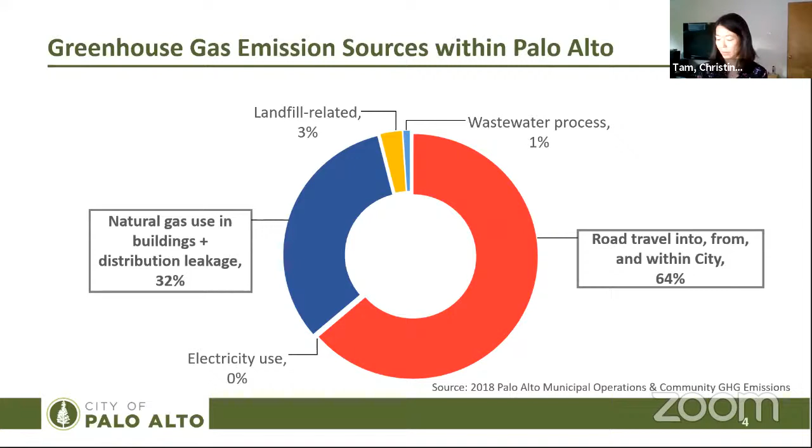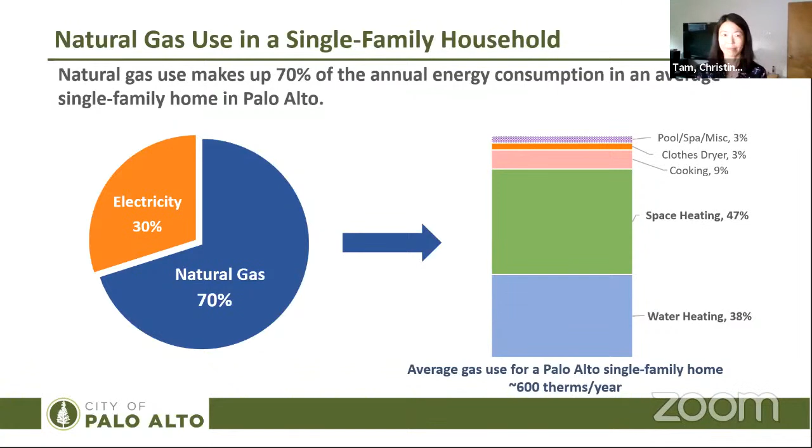So you might ask, isn't natural gas a clean energy source? Well, natural gas is a fossil fuel, and it's usually found in layers of rock formations or in tiny pores within shale formations. Shale gas is extracted by a process called fracking, which is a controversial topic because of its damaging environmental impacts. Natural gas is a mixture of hydrocarbons, primarily methane. It also contains natural gas liquids, such as ethane, propane, and butane, and traces of nitrogen and hydrogen sulfides.

Natural gas has no color and no smell. However, a sulfur-based odorant is added to give it a rotten egg smell, which allows people to easily detect gas leaks. Burning natural gas produces carbon dioxide, which is a key source of greenhouse gas. Other combustion byproducts include carbon monoxide, nitrogen oxides, and sulfur oxides. These pollutants are harmful to your health if the vents for the gas furnace, the gas water heater, and fireplace are not properly installed or maintained. Cooking with a gas stove without proper ventilation can result in unhealthy levels of nitrogen dioxide inside the house, and this can increase the risk of respiratory issues such as asthma.

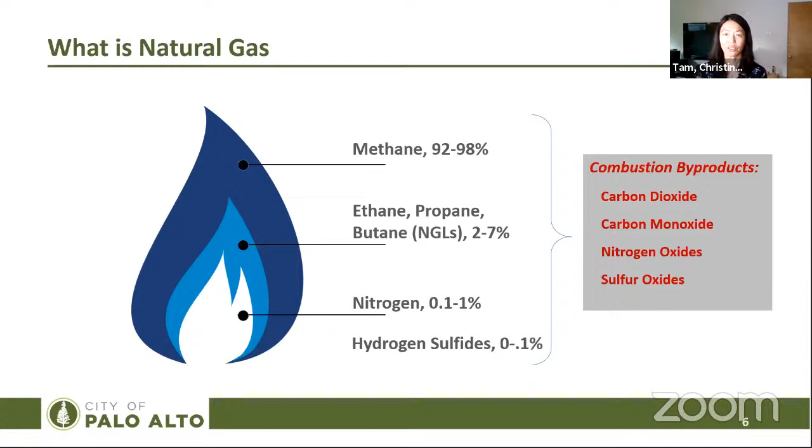There's another problem with natural gas. The natural gas system, from production to transportation pipeline, down to the gas appliances in your home, is leaky. Around 2 to 3% of the methane is leaked from the production and transportation of natural gas into the atmosphere, and then another 0.5% of methane is leaked inside the home. While these percentages may not sound like a lot, methane is a very potent greenhouse gas and has a global warming potential that is 86 times higher than carbon dioxide over a 20-year period.

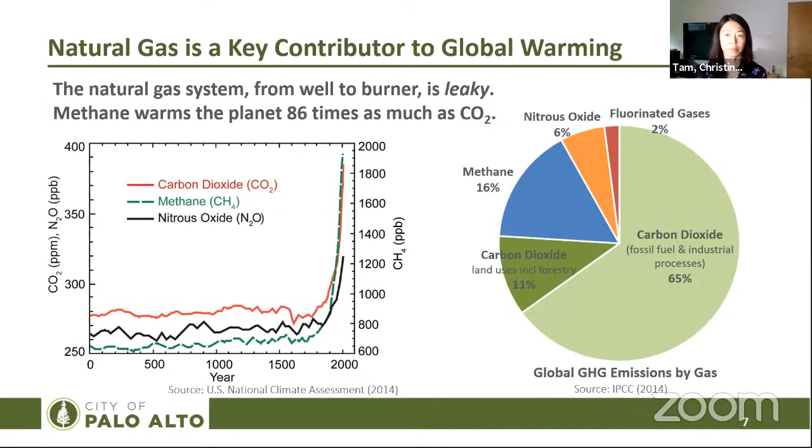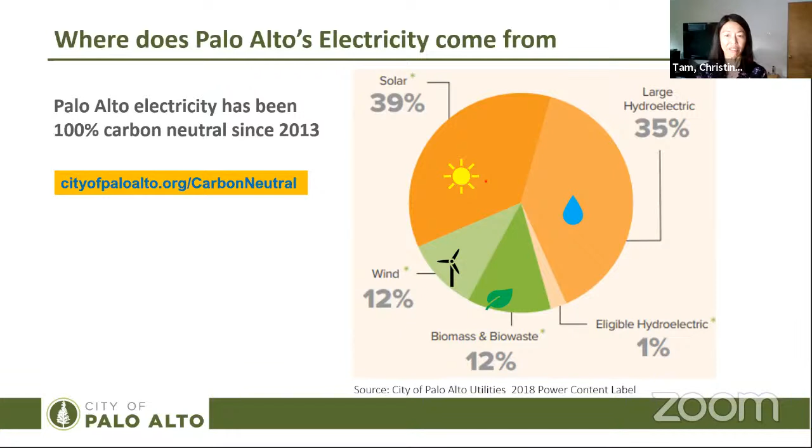So let's turn now to look at where Palo Alto's electricity comes from. Palo Alto electricity has been 100% carbon neutral since 2013, and this means that electricity supplied by the City of Palo Alto comes from clean, carbon-free sources, including hydroelectric energy, solar energy, wind, and biomass energy. Palo Alto does not have any long-term power contracts for gas-fired electric generation. At the state level, California has already phased out coal-fired electric generation. By 2045, 100% of the California electric grid will be carbon-free.

With all electric appliances, you get the peace of mind that there will be no risk of gas leaks and no unhealthy combustion byproducts. Also, since there's no open flame from gas appliances, there's also a lower fire risk. So choosing electric is better for your safety, better for your health, and better for the planet.

There are some very efficient electric alternatives to gas appliances, and I'll be focusing on two proven technologies that have been around for decades and are well suited for home applications. The first one is the electric heat pump. A heat pump is a device that uses a small amount of energy to move heat from one place to another. The refrigerator in your home is an example of a heat pump. It pulls heat from inside the fridge and dumps it into the surrounding air.

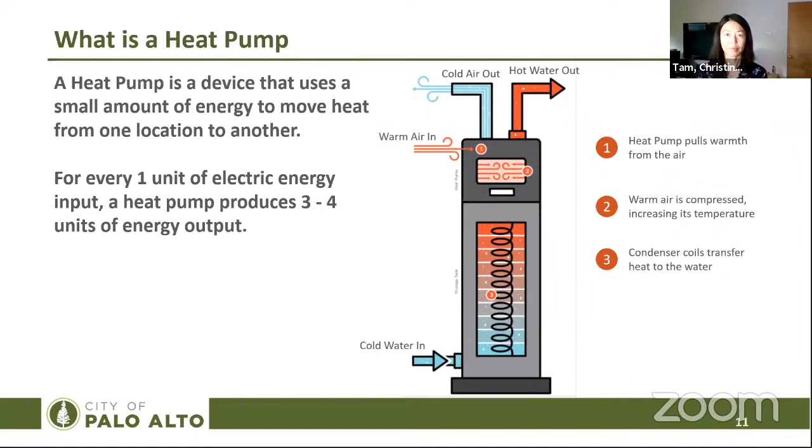All gas water heaters have a flue pipe to send the exhaust gases outside the house. However, there is a risk of backdrafting, which means the combustion gases are flowing back inside instead of out through the flue pipe. Backdrafting could happen when the air pressure inside the house is lower than the outside. The combustion gases contain carbon monoxide, which is lethal, and that is why California law requires carbon monoxide detectors in homes.

Let's compare the efficiency of different types of water heaters, which is rated using the energy factor. The higher the energy factor, the more efficient the water heater is. Heat pump water heaters have an energy factor that typically ranges between 3 and 4. The energy factor for gas water heaters, on the other hand, is always less than 1. Usually between 0.6 to 0.7 for tank style and 0.9 to maybe 0.95 for tankless models.

Heat pump water heaters also provide smart controls that allow you to remotely control the water heater or save energy when no one's home by setting it to vacation mode. If you have a rooftop solar system at your house, you can program the heat pump water heater to run during the hours when you have excess solar output from your PV system.

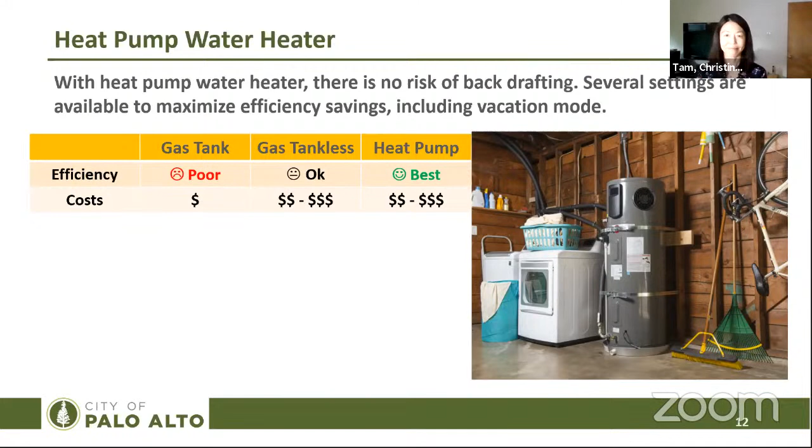So next, we're going to talk about another heat pump application for your home, the heat pump HVAC. A gas furnace can provide space heating only, and an air conditioning system can provide cooling only. A heat pump HVAC can operate in both space heating and cooling mode, and very efficiently. It also provides good air filtration, which can be very important given the poor air quality we've had over the past few months.

Heat pump HVAC systems have two parts, an indoor unit, which is the air handler, and the outdoor unit, which is the heat pump. We'll go over two types of heat pump HVAC systems. The first type is a mini split. A mini split can have multiple indoor units and does not require ductwork, so they work well for homes with no ductwork and for room additions.

The indoor unit can be installed high on a wall or on the ceiling. Mini splits have been around for decades, and they're very popular in Europe and Asia. The second style is the central heat pump system. If your house has a central gas furnace, then a ducted central heat pump system would make a good fit for your home. Leaky ducts, however, are a common problem and can lose 20 to 30% of the air that moves through the system. So we recommend that you have your ductwork serviced on a regular basis to minimize air leaks.

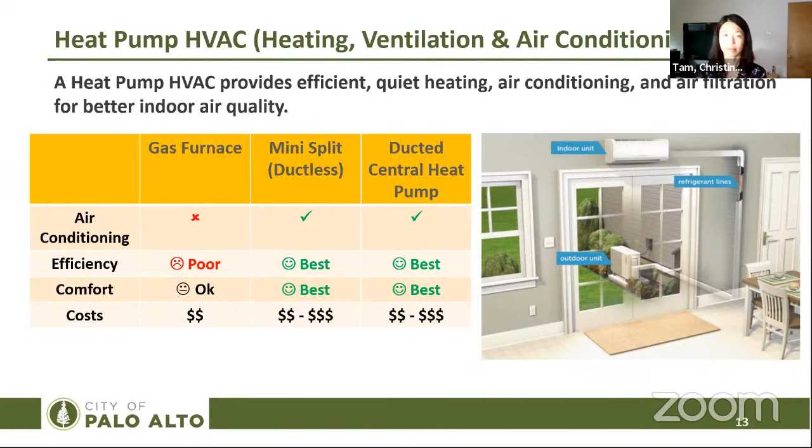Next, we'll turn to cooking. So for cooking, we're recommending induction stoves as an efficient alternative to gas stoves. An induction stove uses electromagnetism to create heat inside the cooking pan. These are not the old electric coil stoves from the 1950s era.

The surface of the induction cooktop is usually made of a tough, heat-resistant glass ceramic material. They look like electric smooth-top burners, but the cooking surface never gets hot. When the pan is placed on the cooking zone, the magnetic field induces electrical currents inside the pan, and that heats up the pan. There's no energy lost to the surrounding air.

For cookware, they need to be made of a magnetic material. Cast iron and stainless steel pans work well with induction stoves. If you want to know whether your pots and pans are compatible, you can test them by sticking a magnet to your pan. If the magnet stays on, then it is induction compatible.

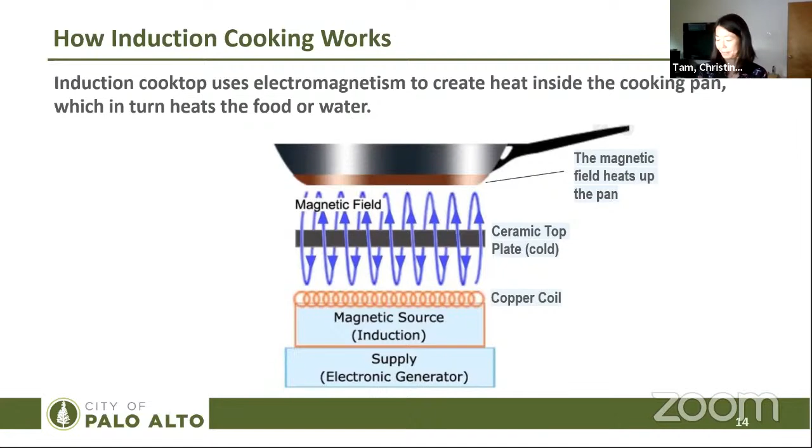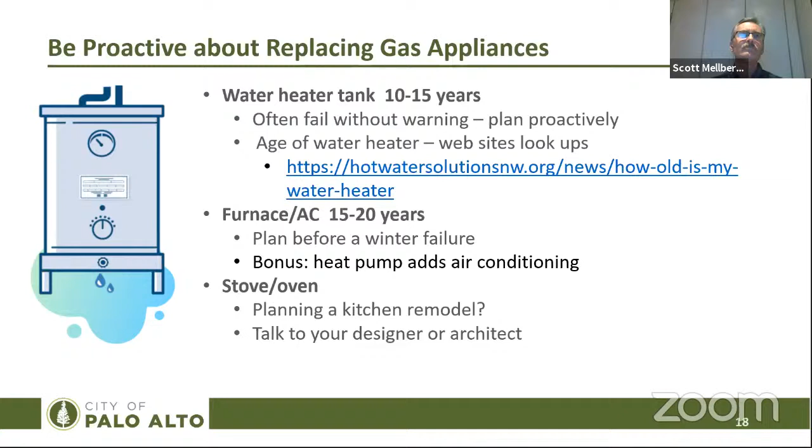So once you know the age of your appliances, you're on the path to electrifying your home. If you've not remodeled and live in an older home, you may need to consider the electrical panel. That's the box on the side of your house with the circuit breakers, or maybe even fuses if you have a really old house. And its capacity may be a factor in this journey. Most older homes have a 100 amp panel; remodeled, upgraded, and most newer homes will typically be 200 amps.

Because your home's comfort and efficiency are heavily dependent on your home's building shell or envelope, what we often call insulation, it's important to take into consideration when planning your heating and cooling system. Most gas furnace systems are grossly oversized, and so your heat pump sizing will be designed to properly meet the home's comfort needs. Smaller equipment is less expensive to purchase and less costly to operate. A well-insulated, sealed home needs less heating, needs less cooling, and is therefore more resilient to temperature fluctuations. So your steps might be to consider these next actions.

You may need to upgrade your electrical panel. You also will want to plan the circuits and the wiring to those electrical appliances. For example, if you have a circuit to your water heater or a circuit to your stove or range, if those are gas now. Heat pump water heaters do prefer to have air around them, so you may consider their location. Garages, basements, and outside-facing closets all work really well. And due to the recovery time, you may want to upsize your heat pump water heater tank.

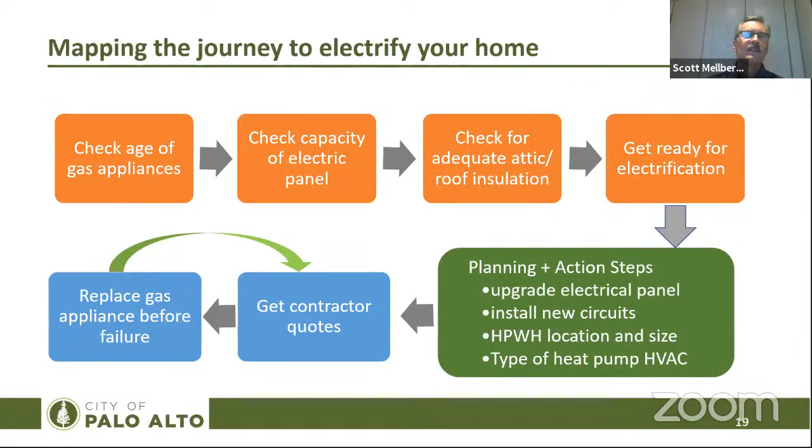So all these steps I just outlined, they might sound daunting, but don't get overwhelmed or intimidated. Just contact the Home Efficiency Genie. Since 2015, the Genie has been Palo Alto utility customers' trusted advisor. If you want to take the first step to electrifying your home, the Genie is here to help. They offer free, over-the-phone electrification and efficiency advice to all Palo Alto customers.

For a nominal fee, they can provide a comprehensive service called a home electrification readiness assessment. And that will evaluate your panel capacity, your existing appliances, and how to plan for more electric appliances. They even can provide a list of electricians who are familiar with panel upgrade projects in Palo Alto. The Genie also offers independent advice on upgrade projects, including upgrading your insulation and home air sealing, changing your furnace for a heat pump system, or planning for a heat pump water heater.

The Genie maintains a list of qualified vetted contractors who specialize in electrification and home performance. The Genie advisor will not only help you find the contractor, but they can also provide guidance and independent reviews of any bids you receive from those contractors. And this advising service is provided by the City of Palo Alto Utilities just for you. So your takeaway is start with the Genie. Their web address is efficiencygenie.com. And we'll actually include the Genie web address at the end of the presentation as well.

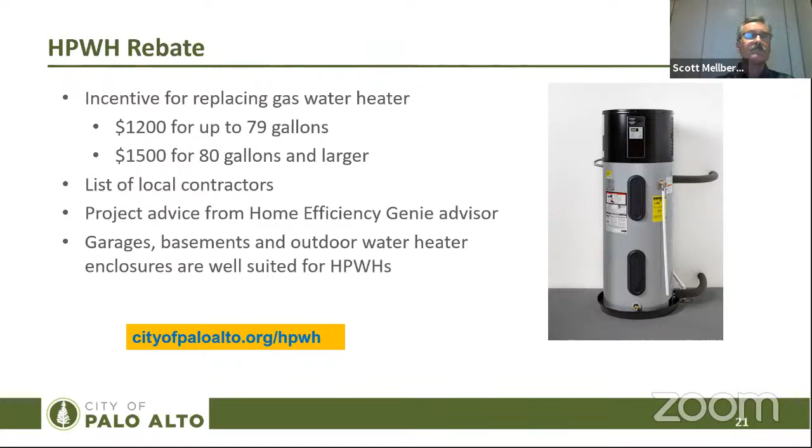I won't read all of these testimonials from local neighbors who are on their journey to electrifying their homes, but you can see from reading them that they're very pleased with doing the right thing for themselves and for the planet. But more importantly, they're solving problems with their own home and saving money. I love the last quote from Javier, who has the 100-year-old home, and they've added a heat pump HVAC system, and it solved a decades-old comfort problem. He says, "Winters downstairs and summer in the attic are no longer to be feared."

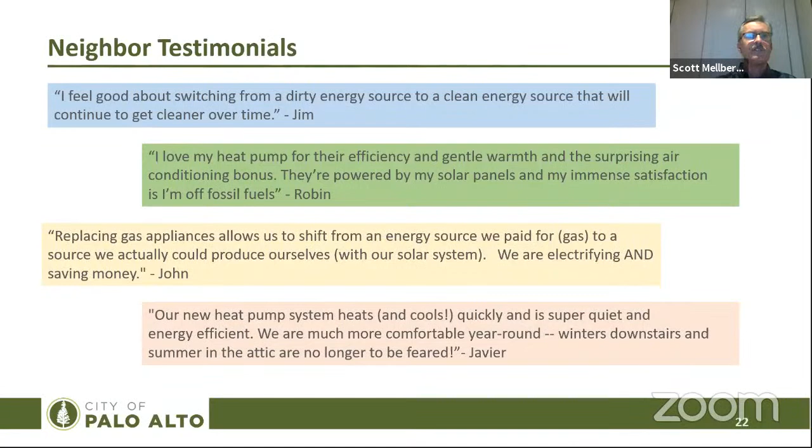So we've covered a lot of material and concepts tonight, but I want to provide you with a concise summary, and these are really your key takeaways. All electric homes are cleaner for the planet, plus safer and healthier for you. There are many very efficient electric alternatives to gas, and these electric technologies are mature and well proven. And lastly, make a plan for your electrification journey. And you know the Genie is here to help, so feel free to contact them.